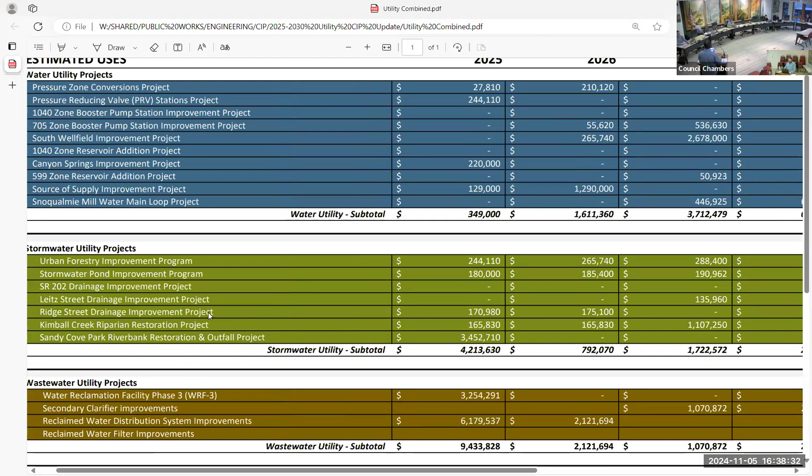For example, the Canyon Springs Improvement Project is one that's coming up this year, and it looks like it doesn't come up again—it doesn't show up in the years listed on this sheet. So, to Councilman Holloway's point, is that one of them where we really need to get it done ASAP?

Yeah, this is a good example of one that's more complicated to unravel. We tried to package work that, when we do a system plan, gives us a really deep dive list of tasks associated with different infrastructure. They don't call it a grouping of tasks like Canyon Springs improvements—they say this section of line needs to be replaced at this rate, or this pump has this age factor, all these types of details. What we do is combine all that to try to make it into a sensible project to approach.

In this case, there's urgent work that needs to be done for the chlorine generation to treat the water coming out of the Canyon Springs. The chlorine generator is undersized for the location—it's running too many hours, which means it could have risk of failure. So what we want to do urgently is upscale the pump appropriately so it's not overrunning, and try to meet the need. Part of why we attach it to Canyon Springs is because it's trying to showcase all the work we're doing there.

So one part is the chlorine generator, but the work that happens in 2030 is really about stabilizing the line with a road access point to our spring box. That will come later, when it's more urgent. So this is an example of us trying to—compartmentalize isn't the right word—but to group like-minded work together.

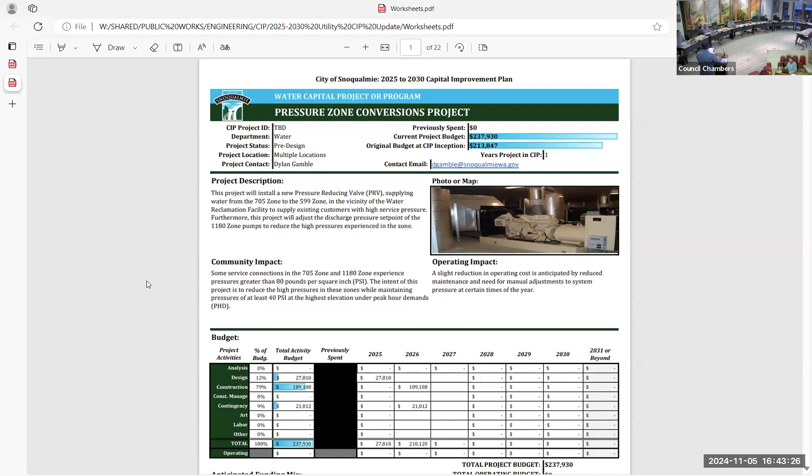I'm happy to also go through each of these projects as a kind of showcase here. You should be familiar with this kind of document, right? So this was the same structure and format as you've seen in the non-utility CIP. We have draft versions of it.

This is another one of those projects that doesn't have a follow-up in the near years—the pressure reducing valve station project. Some projects happen now, and we would need to address it in the future if the pressure reducing valve system were to fail. But this one is a good example of one that happens here now, in that we would do a whole new project if the time arrives that we needed to address pressure reducing valves later.

There's actually two pressure reducing valve projects for different zones. If you think about the city vertically with water pressure at each level, pressure reducing valves are taking the water from a reservoir and making it usable to the residents below it, without blowing their pipes out with 150 psi water, or having no water at all because we've let it go too far, for example. So pressure reducing valves are to try to measure that.

What we're seeing with pressure reducing valves in two different zones, hence two different projects, is that they're having some issues where customers further at the ends of lines are either getting high or low pressure. So we want to correct it with new valves that account for that.

So we'll see two different projects trying to achieve a kind of similar end, but at different areas for different reasons. Is that the kind of thing that could blow out one of your pipes? Yeah, it can.

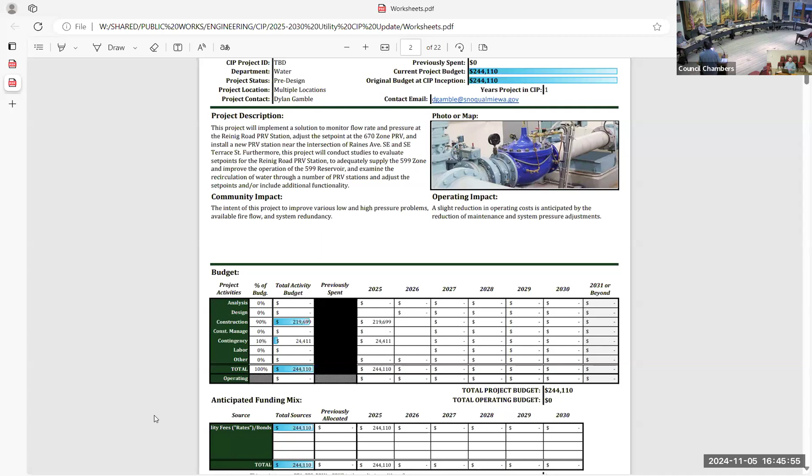And then I guess, unless you want me to deep dive into each of the worksheets, happy to do. But you'll note some of the projects have a pretty big differential in cost. So Water Reclamation Facility 3, not to tease Andrew, but that's a much more expensive project than a pressure reducing valve for the 705 zone. And so we have a couple of big projects, and we were trying to be cognizant of the timing of those. So what's the source of supply improvement project?

That project, actually Jeff, you're the expert. Sure, I can dive into it. Source of supply improvements is actually focused primarily on our ASR, the Aquifer Storage and Recovery Program that we're currently pilot testing now. And if we're successful, that will add approximately 140 acre feet of new water supply to our system.

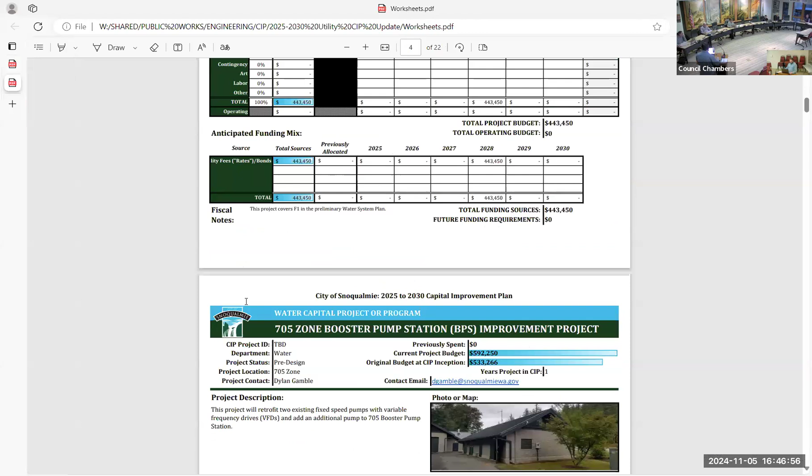Sounds like a lot of water. It's a lot of water. It'll definitely help us out with our limitations on instantaneous limits. So we have an annual limit and we have an instantaneous limit that we can draw from our sources. Where we are running short is on our instantaneous limit.

And so what we need to find, you can't just go out and buy a water right. There's just very few opportunities to gain more water. And so this is a good opportunity for us, for actually a pretty small investment, to gain quite a bit of extended water rights to address drought tolerance, resiliency, and limited growth.

However, what we have right now is a temporary water right to test this. So we draw water, we have about a 2 cubic foot per second water right from our spring right now, which is 900 gallons per minute, let's say. And that is 24/7, 365 days a year, we can take that much out of our spring.

Well, in order to do this pilot test, we have applied for and received a temporary water right to take an additional 500 gallons per minute from the spring and push it right down into our aquifer to pump it up. And we're going to pilot test this to see how much of an effect it has.

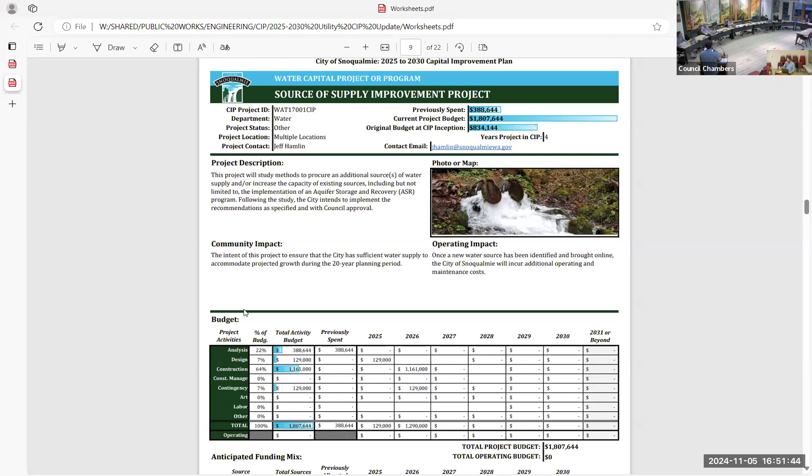Council people, anything else?

Ridge Street drainage improvement? What's wrong with Ridge Street?

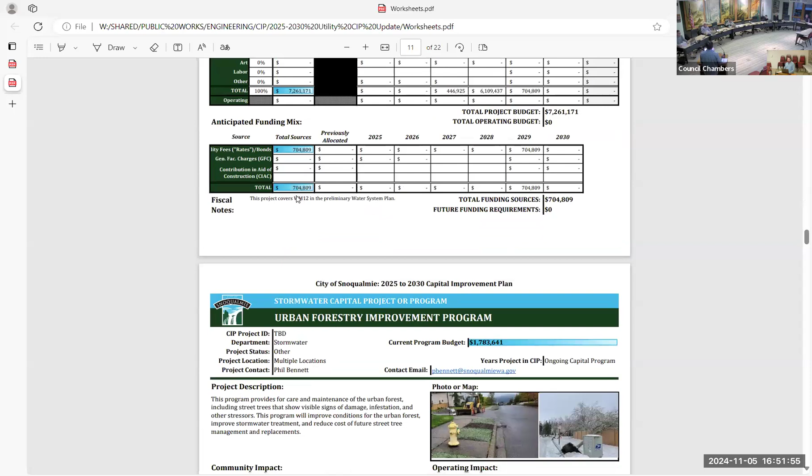This is one of those catch-up problems, a project that's been sitting there for a while. Tree roots have intruded into the pipe and catch basin and destroyed the pipe. We've tried to maintain it for a while by cutting out roots and grouting it, but the tree just keeps growing. What we really need to do is dig it up, replace a segment of pipe, and carve out some roots around that area and clean that up.

It's not a big project.

Whose trees are to blame? Or these aren't Phil's trees, are they? Yeah, they're Phil's trees.

But it's not the tree's fault, it's not due to a specific kind of tree or anything like that. I think maybe one particular tree has found a source of water and it just kind of worked its way into that pipe. It literally just destroyed that pipe, grew in, and collapsed it.

It needs to be cut, the root taken out, and a segment of pipe replaced.

It's a lazy tree. We don't need any freeloader trees in this town.

Where's the SR 202 drainage improvement project gonna be?

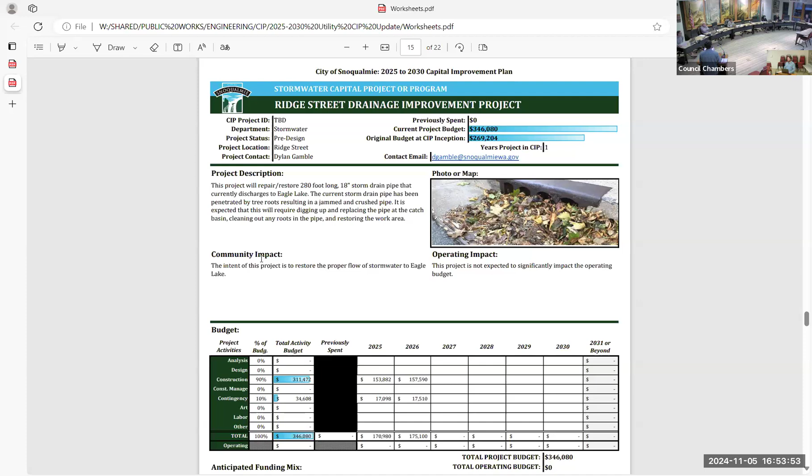We have old undersized stormwater conveyance systems in those locations, which aren't draining and are causing us problems, so those need to be corrected. We're hoping that one of those we can probably take care of with the Town Center Phase 3 project.

I was just gonna ask if they were gonna be coordinated together. We're going to try to do that. Yes, absolutely — coordinated, not together.

The state would get mad at me for saying they're together. They are separate projects as far as our grant application and the scope of work we've submitted to them. But we will be aware of this project, and it's also scheduled out to '28, to capture that criticality detail.

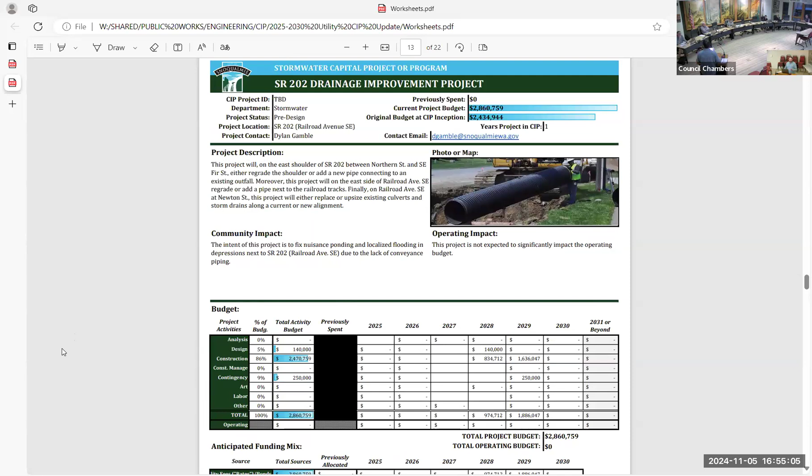No, just a note that you'll be seeing this soon. A lot of the work you'll be working through with the rate study is in fact the sources for a lot of these projects. I didn't want to send this out because it's underwhelming, it doesn't have the sources made up yet. That's a lot of the conversation happening next. The sheet in front of you will actually have a top section that goes into all those details. I just wanted to contextualize what I was showcasing here and what you got there.

And I guess now I can lead right into the rate study conversation.

Yeah, I just want to say, no big surprise, it sounds like real thought is going into this, and we appreciate you explaining it. It's helpful to be able to give an answer if we're ever asked why the heck are we doing this one right now?

Yeah, I do try to work with all of the project managers themselves on the sheets to make sure that if you do get a question like that, you should be able to grab this sheet, hand it to them, or read it real quick and remind yourself exactly what's going on, and the what, why, and how, and what the impacts are. So hopefully that's beneficial as well.

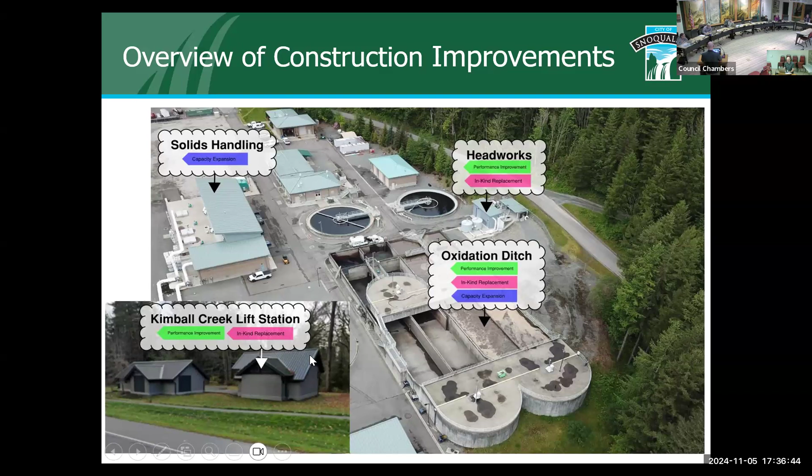Up in the corner of the solids handling facility, that project portion is about 50% complete. We've retrofitted one digester and will start that up next week, then retrofit the second digester. The Kimball Creek lift station project, in the foreground, is delayed due to some long leads on electrical equipment, but the work will be completed summer 2025.

Again, recap, we're moving ahead. We're ahead of schedule at the WRF facility improvements, and we are expecting completion January 2025 on that portion of the project.

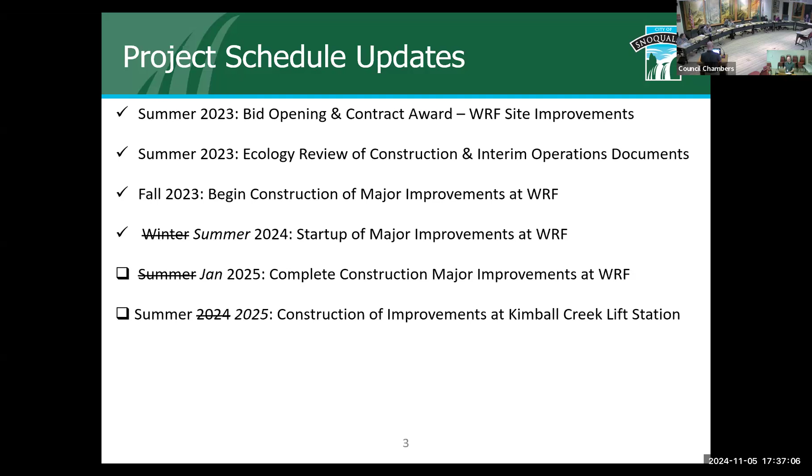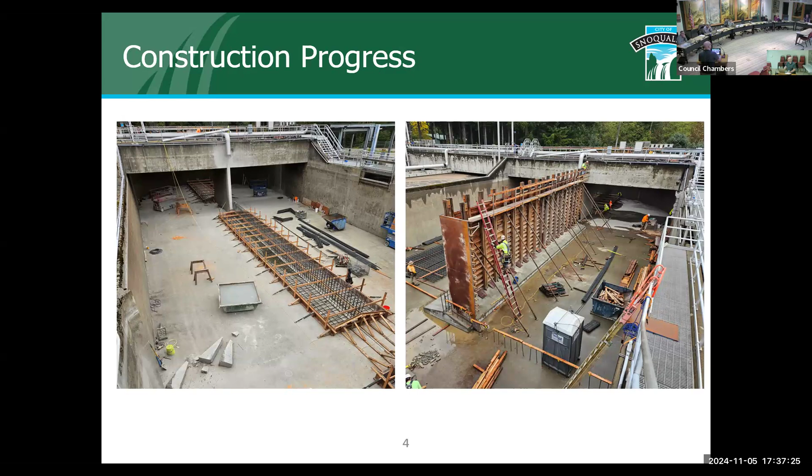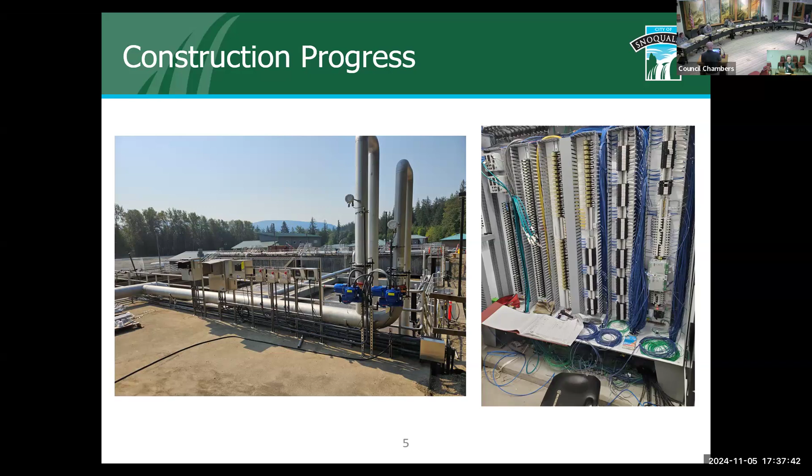There's been a lot of extensive mechanical and electrical improvements. All of this work has to get tested. There's alarms built into the SCADA programming. So over the summer, we spent a lot of time testing to make sure all the backup alarms were in place.

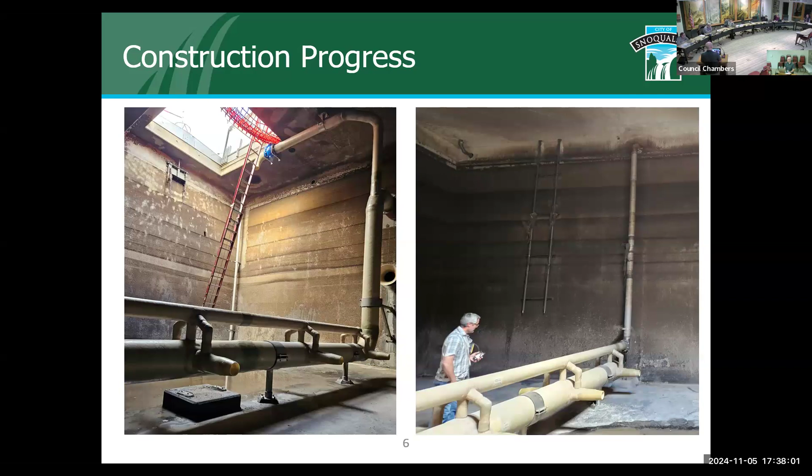Here is the digesters with the new jet aeration equipment. This was just taken last week, and we'll be filling that digester with solids later this week and starting it up. You'll let that guy out first, though, right? Absolutely, yeah.

So I did want to hit on Basin 2 startup. This is a pretty significant part of the project. It took about 3 to 4 months, and we decommissioned the old biological process that had been in place for about 25 years, and we grew a new population of biota.

And then the tanks changed along the way, but overall we're seeing, we call it sludge, the bacteria settle about twice as fast as in the previous process. That means you need half the tank volume to clear it up, which is really good for our clarifiers. We're not going to need to build a new clarifier for some time now.

So that's really promising. Wait, and that's because of the efficiency of the biota? That's right, yeah. So how dark that bottom layer is and how quickly it settles improves performance. Did we just have lazy biota before? We had a different type. Yeah, we had something called filaments, too many of them, and they don't settle as quickly.

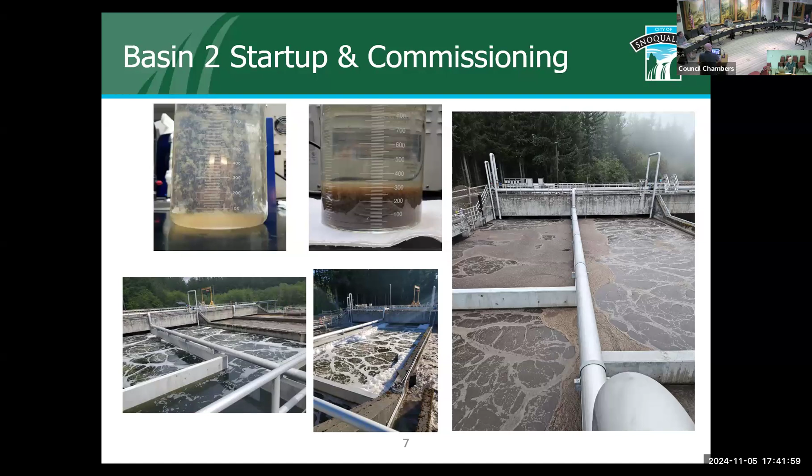Impressive. That's neat. Yeah.

Over the summer, highlighting city sewer operations and the project team, there's been a lot of collaboration, bringing up concerns quickly and then communicating and working through them.

During process commissioning and decommissioning, while we grew the biota, we actually had to dispose of 25,000 pounds of old biota over a couple of weeks, and we did that without any violations of our NPDES permit. That was a big win.

It gets processed into biosolids for farms, but we ran those facilities at max capacity for a couple of weeks.

Then all the new equipment came in, and our operations staff got trained on it. From what we're seeing, we're getting 25% additional capacity in our process right off the bat. So we're ahead of schedule and we'll have capacity for the casino to come online.

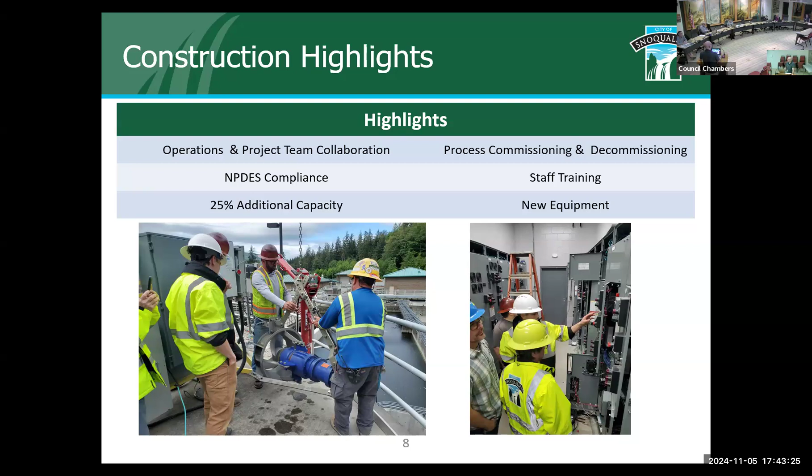To wrap up on decommissioning and commissioning, the process has been in flux for about 3 or 4 months, and our operations staff are used to steady-state, constant operation. So kudos to the wastewater staff for leaning in and working through these changes and helping with the project. We're looking forward to turning the corner and wrapping up the project in the next couple of months.

I'm happy to answer any questions, or go more into the biota if you'd like.

I haven't seen anybody get such a happy face talking about biota. That's very helpful, thank you for informing us.

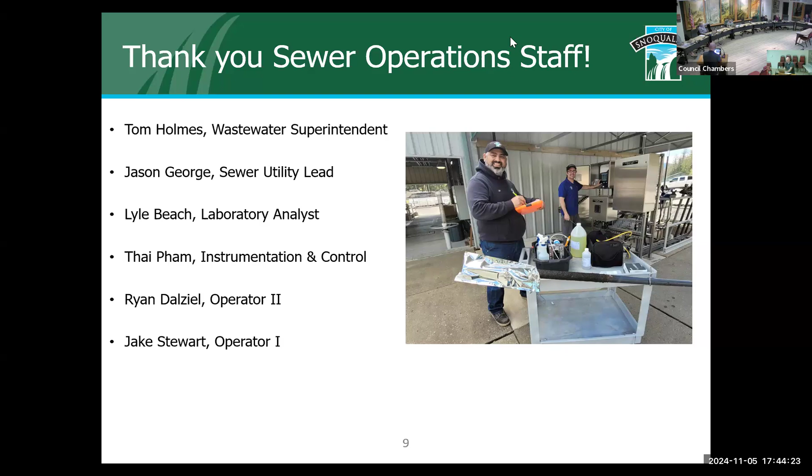All right, you got something there? I would also say it's very impressive to be 85% complete. Seems like everything fell right where it needed to be, given concerns about weather and other factors, and taking part of the ditch offline. So nice job on the whole project, and on a couple-year project, that's very impressive.

Yeah, thank you, I'd definitely pass that along to RH2. They engineered our plan through the summer. We had an approved plan for this whole project, so it wasn't just making decisions on the fly. Kudos to RH2 on their design.

Right, very cool. Yeah, thank you. What's next?

Legislative priorities, council priorities, there's a version of it attached to the minutes. Is there a way for us to get it up on the screen?

The two things of real significance, at least for this committee: one is the community center, and focus for the legislators on it. It's incorrectly stated as $5 million state funding, but it's really $4 million county, $1 million state.